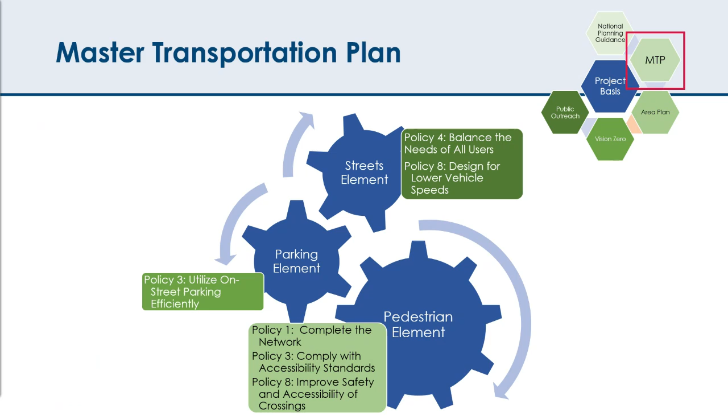I'm going to touch on the parking and pedestrian elements when talking about the area plan, because when we were developing the area plan, we took what was in the County Master Transportation Plan and looked at how to apply it in an industrial area.

4 Mile Run Drive is a little bit unique compared to other projects in Arlington County because of its industrial nature. We know there's a need to maintain access for trucks and other large vehicles that service the businesses along the street. So we kept that in mind as we were developing our concepts, while also looking at how to improve access and safety for other users.

With Jenny Dean Park recently opening on the east end of the study area, we know this area is going to continue to draw more and more visitors. Some of those visitors might be more vulnerable users like children or people with mobility issues. So when developing our concepts, we kept front and center: how do we make it safe for everyone to use the street?

Looking at what was recommended in the area plan, the plan developed a highly conceptual concept that looked at reconfiguring the roadway down from 2 lanes in each direction to 3 — meaning 1 lane in each direction with a center turn lane.

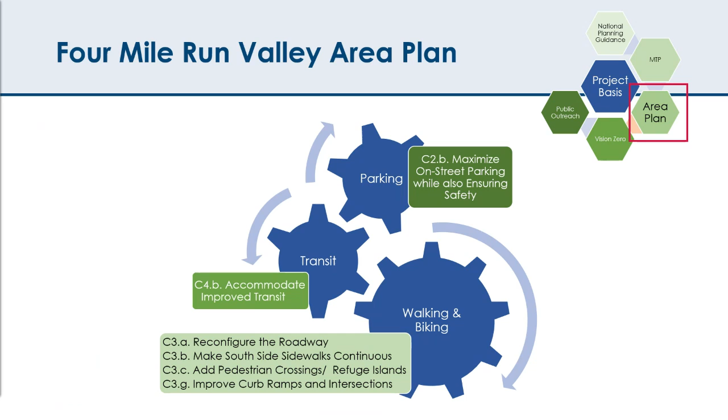I mentioned that I was going to explain a little bit more what a high injury network means. The section of 4 Mile Run Drive between Walter Reed Drive and Shirlington Road was on the high injury network, and that means that compared to other roads in Arlington County, there's a relatively high rate of severe injury crashes on this stretch.

So a couple of years ago, our traffic team did a more extensive safety study on this part of 4 Mile Run Drive. When they did that, they collected traffic data, including traffic volumes and speed data. This was really useful to us because it put hard data to some of the feedback that we heard and gave us more information to base our designs off of.

Two things I want to point out here. One is that pre-COVID, when volumes were a little bit higher than what we'd expect to see now, there were approximately 12,000 to 13,500 vehicles on this part of 4 Mile Run Drive every day. According to the Federal Highway Administration and what we see nationally, these volumes are actually relatively low compared to what you'd expect on a roadway with 2 lanes in each direction. So based on these volumes alone, we expect that reconfiguring the road to what's presented in the area plan should be relatively easy with just some minor tweaks to intersections or signal timing.

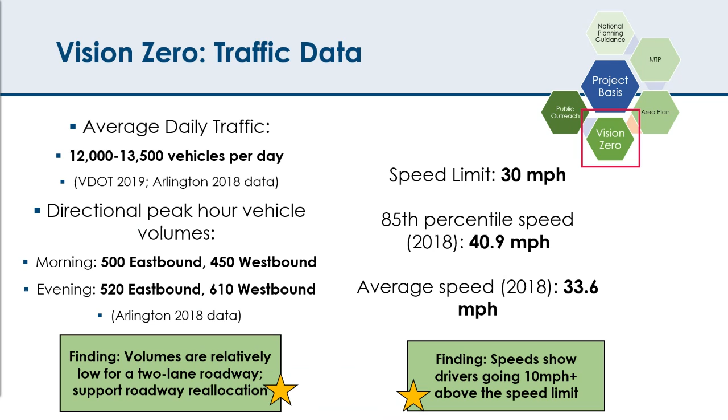I'm going to quickly talk about some of the feedback we received in June and July, but in the interest of time I'm moving quickly through some of this. We will be posting a more extensive summary of what we heard online, and I'll make sure to include a link to that when we put these slides on the project website.

We took a multi-pronged approach to gathering feedback from you all. I've already mentioned that we had our virtual public meeting in June, with 15 participants, not including county staff. We also kept an online feedback form open for 2 weeks after the virtual public meeting.

In addition to these 2 online forms of feedback, the project team actually went out onto the site one afternoon to speak to employees and managers at local businesses. We went door to door and spoke to people where we could, and managed to speak to about 13 groups of people at local businesses. We couldn't reach everyone, or some people were too busy to talk to us or didn't have immediate feedback, so when that was the case, we left flyers with my contact information and a link to the feedback form.

That same afternoon, we also stopped people as they were approaching Jenny Dean Park or along the W&OD trail to get feedback from people who frequent this roadway just as a user.

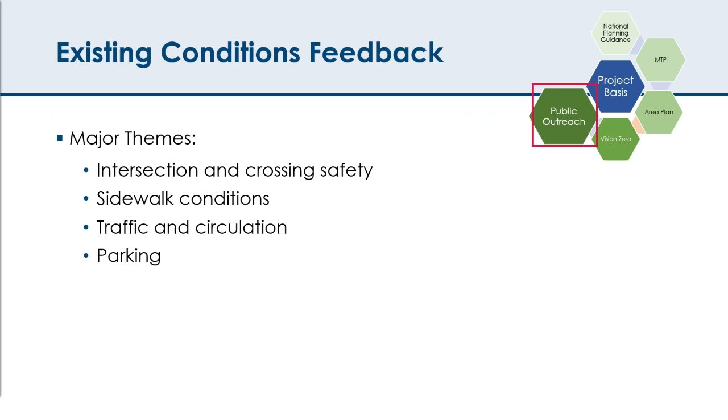So across all of these types of outreach, a couple of major themes emerged that I'll be going into in a little bit more detail.

According to our feedback form, the highest percentage of people ranked intersection and crossing safety as their first priority on this corridor. Something I found really interesting when we were in the field talking to people face to face was that this concern came from pretty much everyone who used 4 Mile Run Drive. We heard from drivers, especially those who park on the north side of the street, from pedestrians, and from people who typically use the bus, that they don't feel safe crossing 4 Mile Run Drive.

A few people elaborated and said that they feel like drivers zoom down 4 Mile Run Drive and don't look for people in the crosswalks, or don't look to see if someone is waiting to cross. And if there is someone in the crosswalk, drivers might not necessarily yield to them, so people feel unsafe using the crosswalks.

A couple of other people also pointed out that sometimes they feel unsafe crossing at intersections because the sight lines aren't good, since drivers park too close to the intersections and block sight lines from oncoming traffic. From people who typically walk on 4 Mile Run Drive, a couple said they feel like they have to actually step into traffic to be able to see oncoming vehicles.

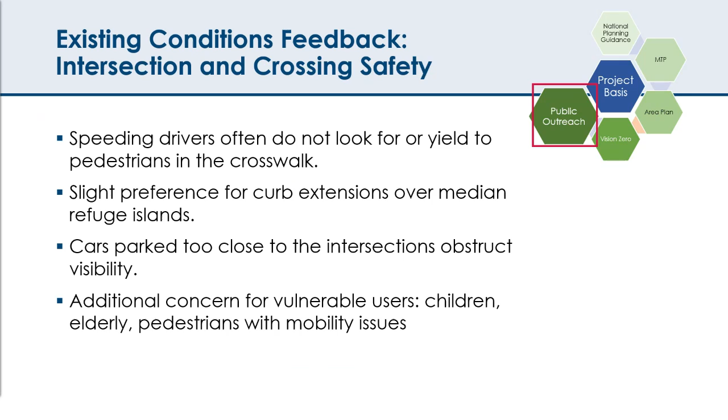The next priority ranked in our feedback form was improving sidewalk conditions on the south side. While there is a trail on the north side of 4 Mile Run Drive, all of the businesses and amenities people are trying to access are on the south side, and we heard a lot of complaints about how inconsistent that sidewalk was, or how dangerous it felt to walk on. The block between Oakland and Oxford Streets in particular was called out as a confusing or dangerous place.

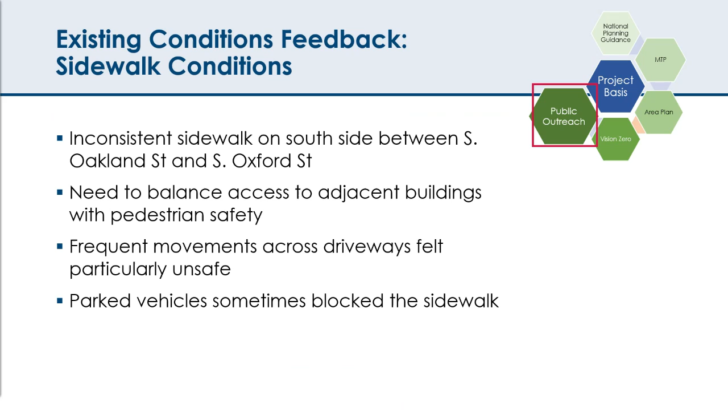We had a couple of people say they would rather cross the street twice than try to navigate that block. It seems like the sidewalk disappears or is parked over by cars frequently. We also had a couple of people say that cars moving in and out of the driveways, and there are many driveways on this part of 4 Mile Run Drive, felt particularly unsafe.

I noted earlier that one somewhat unique thing about this project is that it is an industrial corridor, so we know we need to keep that in mind as we move forward with improvements. Maintaining access to businesses and vehicle circulation to building frontages is going to be really critical, and we heard that from several people as well.

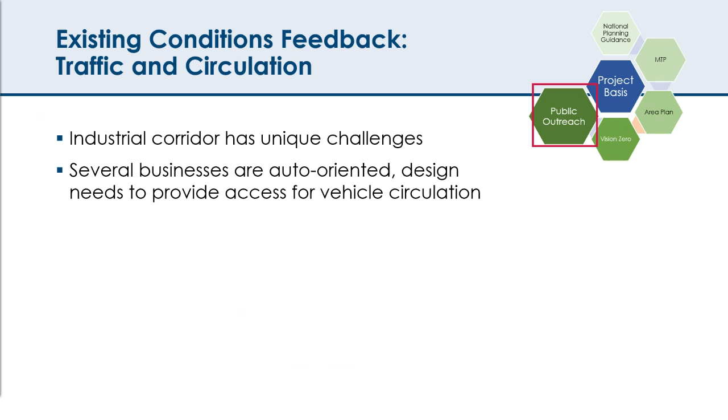And then, of course, several folks told us about a desire to see more on-street parking available on 4 Mile Run Drive. But in addition to people asking about the number of parking spaces, we also had a few people express frustration with vehicles that park in the parking lanes long term, when some of those spaces are really meant for shorter term parking.

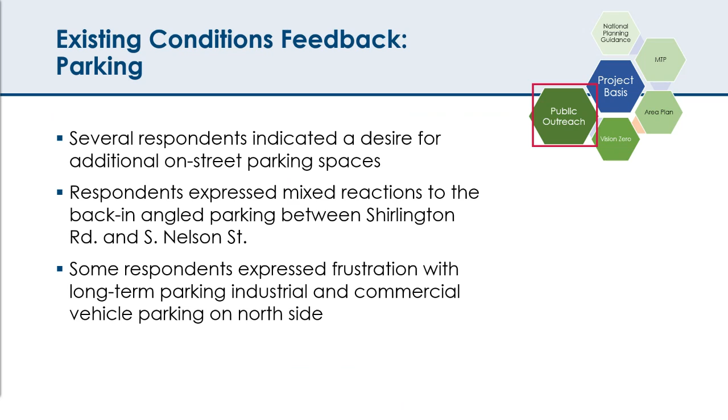I'm going to pause here to see if we have any comments from folks, but then I'll move on to going through our concept design.

Sheila, we do have one question in the chat, and I think we're going to get there. The question is, can you show the proposed design changes? As you can see on the screen here, we're just about to dive into those, and hopefully we can spend most of our time talking about these.

We can hold for, let's say, 30 seconds and see if there are any others, since you had asked.

I'm also going to include links to some of the other resources I mentioned. If folks have questions about the existing conditions feedback, we'll be posting a more extensive summary online. The Vision Zero Safety Study link will be included in the last slide of this presentation.

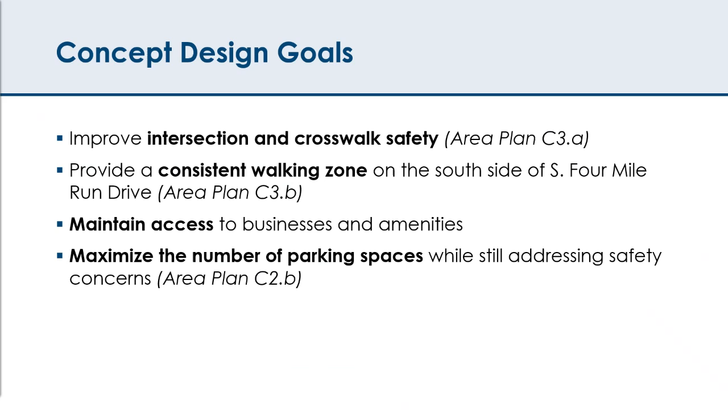I'm going to show our two proposed concepts side by side in just a minute, and I'll be moving through them by intersection and block. You'll notice that they have a lot in common visually.

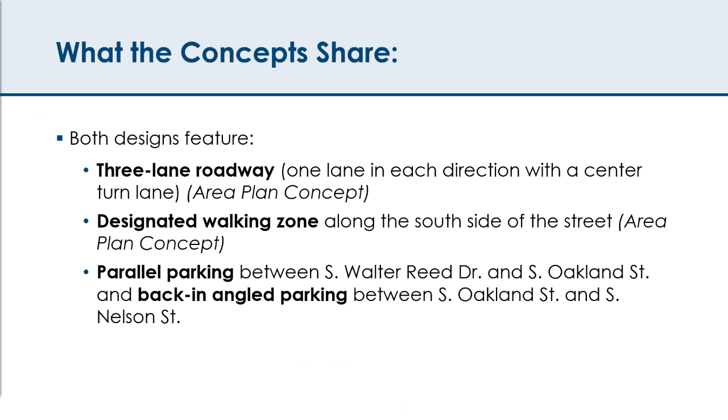Both designs show the roadway being reconfigured to a 3-lane roadway, and we're showing a designated walking zone on the south side. Again, both of those elements are pulled directly from the area plan. We're also proposing a mix of parallel parking and back-in angled parking, and I'll explain why once we move through the images.

The major difference between our two concepts is that in one, we're designating the walking zone only with pavement marking striping, whereas in the other, we're reinforcing and providing a physical barrier between the walkway and the vehicle lane with Jersey barriers and bollards.

In concept one, where we're just using pavement marking striping, we're also maintaining the existing widths of all driveways and curb cuts as they are right now. Because this has less of an impact on how vehicle circulation moves along 4 Mile Run Drive, we're pretty confident that this can be implemented in September. That goes back to what I was saying about our project timeline.

Concept two: the Jersey barriers and bollards are going to change how the street feels more intensely. We're also proposing narrowing some driveways and curb cuts to be closer in line with what county standard is today, which is 20 to 30 feet.

We know this is going to require additional conversation with employees and business owners, and it's going to take a little more thought to figure out how to maintain access for trucks and other people who need to access business frontages. So we'll need to spend a little more time on that design, and because of that, we don't think we'd be able to install concept two until spring of next year.

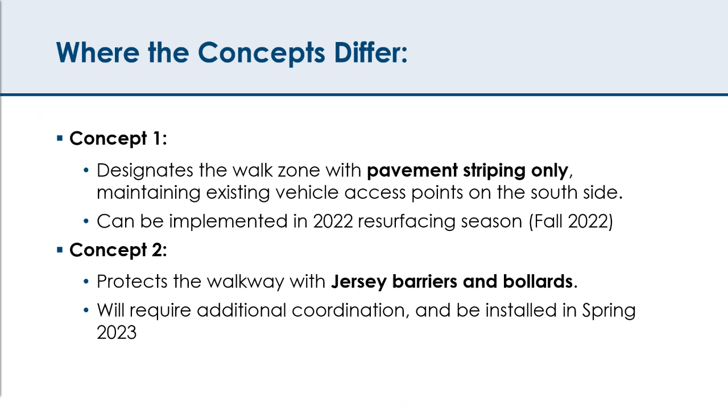So we'll start with the Walter Reed Drive intersection. As I move through each section, I'm going to show 3 slides: one just shows concepts 1 and 2 on their own without any annotation, another calls out what they have in common, and then a slide that highlights the differences between the two. Then we'll pause for discussion.

At the Walter Reed Drive intersection, we're not repaving the intersection itself or anything to the west of it, but we still needed to figure out how to transition between 2 vehicle lanes going eastbound down into just 1 lane in our project area.

I asked our traffic team to take a look at how this intersection operates. We found that if we changed one of the 3 lanes on the west side to a right-turn-only lane and made small changes to signal timing, based on how this intersection operates during rush hour, it'll continue to operate as it does now after we implement these changes.

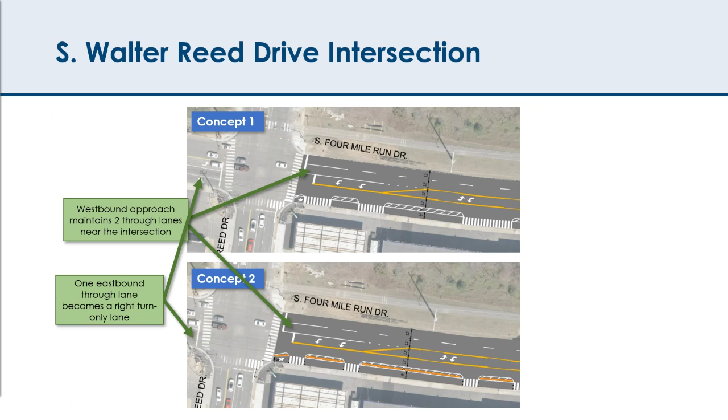Going westbound, we do need another through lane, so we are including a second lane for about 350 feet. You'll see in the next section that after that 350 feet, that second lane turns into a parking lane. But per our analysis, we think that 350 feet will provide enough space to get people through the intersection.

Now you can begin to see how the Jersey barriers and bollards are going to change the way that people experience these two concepts.

In concept 1, we were particularly concerned about how drivers turning off of Walter Reed onto 4 Mile Run Drive were going to know that they can no longer turn into a lane that's right up against the curb. So to direct them into the vehicle lane and keep them from turning into the walkway, we're using lane striping to lead them into what's now 1 lane going eastbound.

I did want to mention that our design engineers modeled what a truck turning movement would look like at this intersection, and that's how we came up with the location and the curve of this lane line.

In concept 2, we're following the same curve and the same pavement marking striping, but we are reinforcing and providing a physical barrier between people walking and people driving with Jersey barriers and bollards. So those barriers will just add additional protection to the walkway on the south side.

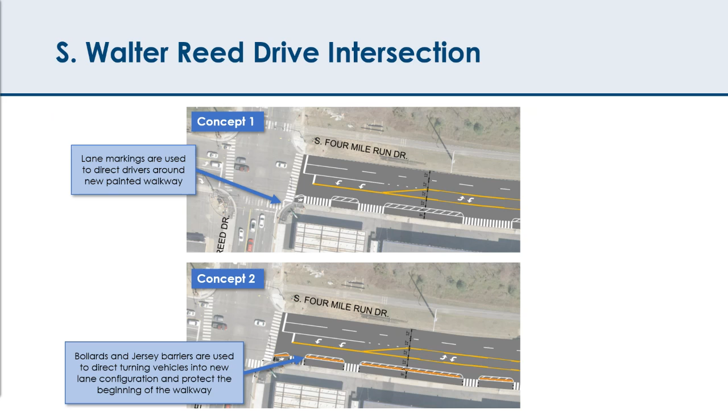Right, I'm going to pause here and take comments.

All right, we did get one comment. It was sent privately, so I can't publish it, but the question is: are you going to add a left turn arrow for the westbound side? I assume that is on the signal head. Would there be a dedicated left?

I think we'll have to talk to our traffic team about what that would look like and how quickly we'd be able to implement it. I'm more worried about changes to the number of phases of the traffic signal than just adding the arrow, but that's something we can ask them about.

All right, we have another question. I'll publish it here. The question is: in concept 1, it seems like it would create a high risk of drivers entering the pedestrian area, especially at night or if driving poorly. People may not feel safe and may not want to use it. Concept 2 seems much safer.

Yeah, I really appreciate that comment. I think one thing we're weighing here between concept 1 and concept 2 is that they're both showing a walkway on the south side. I think if we did move forward with concept 1, we could certainly build upon it before we get to that longer term vision of actually moving the curb out.

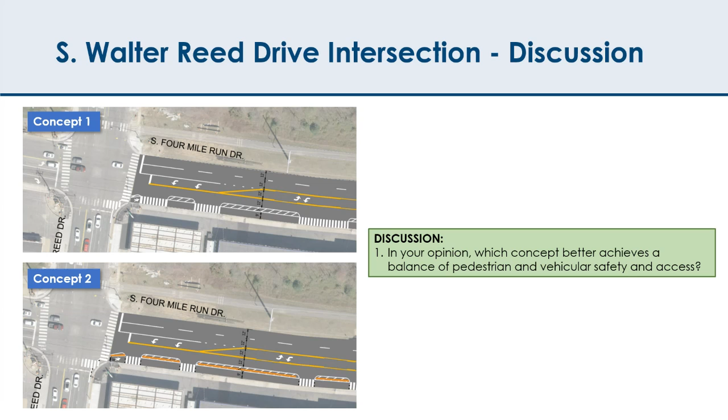So next we're going to be looking at the block between Walter Reed and Oakland. About 350 feet east of the Walter Reed intersection, we're dropping that second lane and turning it into a parallel parking lane. We designed this parallel parking lane to be wide enough for larger vehicles and trucks to comfortably use. We're also using pavement markings and bollards to begin to mock up a median refuge island at Oakland Street, providing pedestrians a space to wait and look for a gap in westbound traffic after crossing the eastbound traffic. Longer term, once we get additional funding and do additional engineering, we'll hopefully install a raised median refuge island there, but right now we can still provide some physical protection with these quick build methods.

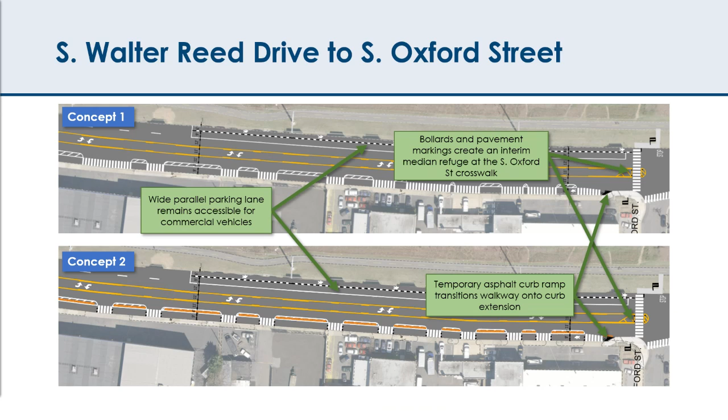And then you'll see here that there's an existing bump out on the south side of Oxford Street. That bump out is used as a bus stop, so to get people off of our painted asphalt walkway and up onto the curb so they can load buses from that bump out, we're going to be constructing a temporary asphalt curb or curb ramp. The intention is to replace it with a more permanent solution once we develop our long-term vision.

Because this is a larger block from our concepts, you can get a better sense of how we would be changing and narrowing curb cuts. The county standard for commercial driveways right now is 20 to 30 feet wide. However, if we move forward with concept 2, we would be working with business owners to get a better sense of how some of these access points are currently used. We have the ability to model turning movements from trucks and other vehicles that use these roads.

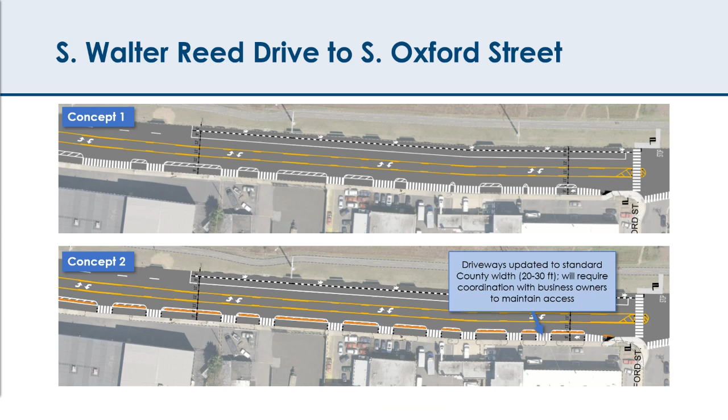Before we launch into discussion, I wanted to note that we worked through a lot of concepts we aren't presenting tonight because they weren't really addressing our safety concerns. One concept we looked at showed back-in parking on this section of Four Mile Run Drive purely to increase the number of parking spaces. But based on feedback, and remembering that this is an industrial area with a need to provide for trucks and larger vehicles, we decided to move forward with parallel parking in both concepts. If there's interest in having back-in and angled parking to increase the number of spaces, that's a concept we can speak more about, but for now we think we want to move forward with parallel parking in either concept.

Okay Sheila, we got a question on the slide, if you're ready to take questions. It's actually a comment: we have tractor trailers coming in and out from both directions, not to mention our own trucks and garbage and recycling coming in and out of 3870. There is no way the hardscape will allow the radius needed.

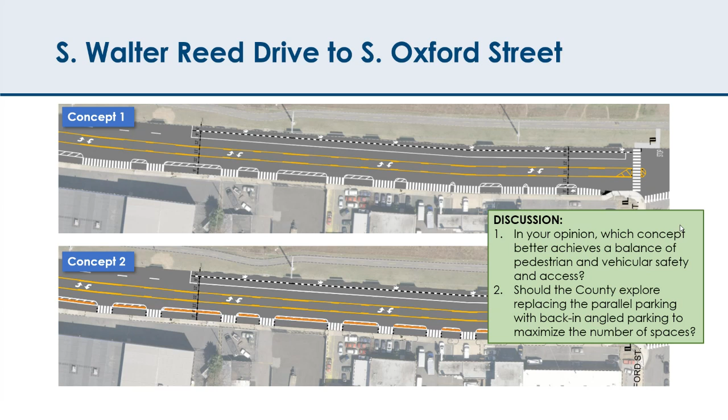This block was called out pretty frequently in our existing conditions outreach as one where pedestrians especially felt really unsafe navigating the south side of the street. It's also getting a little closer to amenities where you'd expect people to be trying to access by walking.

I already talked about that back-in angled parking and why we're including it instead of keeping parallel parking on the south side of the street.

By using back-in angled parking instead of keeping the parallel parking lane, we were able to maintain the number of parking spaces. With the concepts we're showing tonight, we're actually increasing the number of spaces by 1. If we were to keep parallel parking on both blocks of our study area, we'd intuitively be cutting back the number of parking spaces almost by half.

That said, we did think it was important to use a mix of parallel parking and these back-in spaces to balance keeping the number of spaces with also providing some parking spaces for larger vehicles.

One other thing to note is there's an existing bus stop on the north side on Oxford Street as well. So as we get close to that bus stop and the concrete pad, the back-in angled parking gives way into a zone where buses can pull out against where pedestrians or bus riders would be waiting to board.

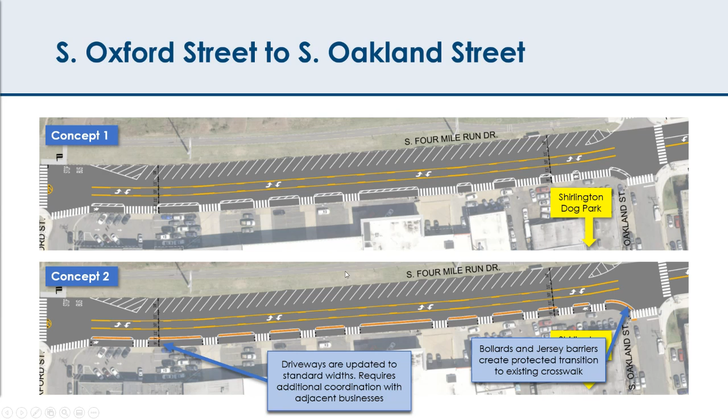This question is, if cars are parked on the north side, how do pedestrians cross 4 Mile Run? Do they have to double back to Oxford? I envision a lot of jaywalking. So by pedestrians, I'm assuming you mean people getting out of the cars and then walking. I think the expectation would be that they walk to the nearest crosswalk and then cross. People are probably still going to jaywalk, unfortunately, but at least having that lane reduction that encourages people to drive more slowly will make it safer for people who are parking on the north side as well.

Sheila, how long is the block? I do not know. I can take that measurement quickly in my other screen, or we could provide that information later.

Well, I'll do it very quickly, and the reason I ask is that we do know that pedestrians will likely not walk more than 250 feet. And so if someone were to park in the middle, right, that would be just over 375 feet.

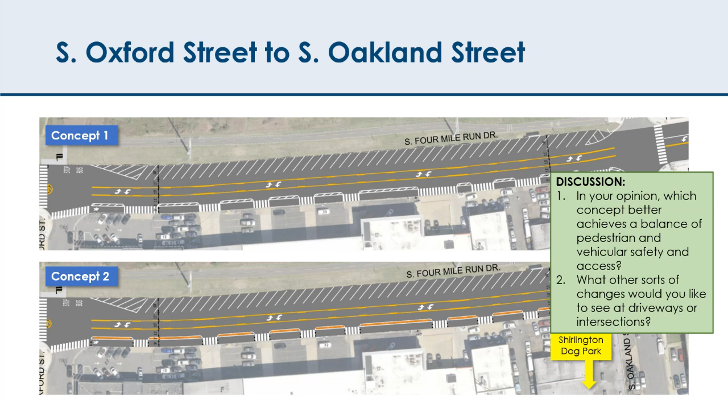I'm going to go ahead and move to the block between Oakland and Nelson, since we did get a question about that already. I'm only showing one image for this block because it's more or less the same for both concepts, because there's an existing sidewalk here on the south side that we don't feel like we need to rebuild or supplement with an asphalt walkway. We're really just using this block as a transition between the improvements we did in front of Jennie Dean Park last year, with the back-in parking on the south side, to what our consistent design is west of Oakland, with that back-in parking shifting to the north side.

Between Oakland and Nelson, and I apologize that part of this design is covered with a label for AFAC, we have one lane in each direction with a right turn lane going towards Nelson eastbound. Going westbound, the lane widens up to allow a little bit of space for buses to pull over to the curb at the existing bus stop. Then in the other direction going eastbound, the second lane is a space for buses to again pull over to the curb so that cars behind them can continue to go through.

Because we did have a little bit of extra space up top, we went ahead and continued the parallel parking that's on the north side in front of Jennie Dean Park, and really just continued the design we had up there until the existing curb bump out.

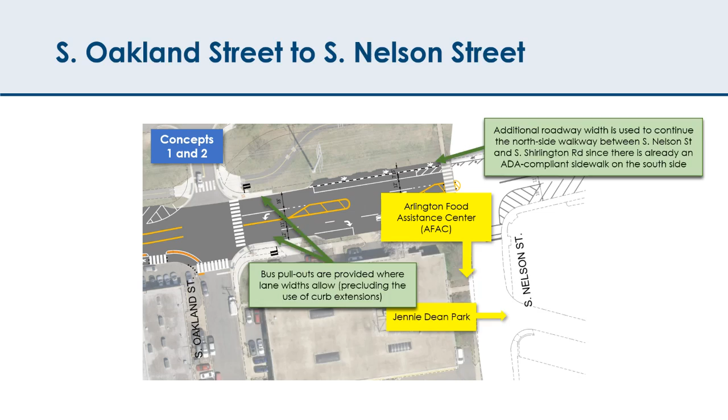I just explained both of these, so we can move right into discussion for this block. If folks have comments, please drop them into the chat box.

While we wait for questions or comments, certainly we appreciate the feedback on the barriers for different reasons, and we're taking that all in. I don't want people to come away from this meeting thinking that we're going to implement something based on majority rules or comments that come in. But if you haven't spoken up today and you want to send feedback later, that's great. It's understood that the barriers are, in most people's opinion, not attractive. There are trade-offs, pros and cons to all the different elements of this, and so we'll sort through and see what fits best for this community. We'll post that and the reasoning behind it on our website once we get all of that feedback, and be very transparent about what was received and how we came to conclusions. So thank you everybody for the comments.

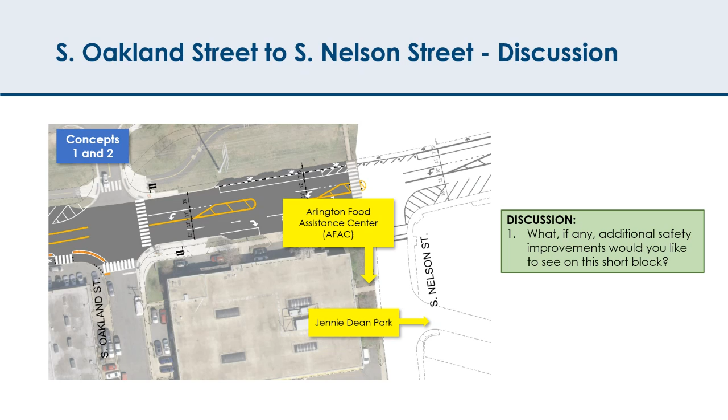All right, well, we don't have any more questions or comments, and I know we've run past time. I'll let Sheila close it up, but I'll also just say thank you to everybody for attending tonight and providing the questions and comments.

So just to quickly wrap things up, the next step in the process is choosing a preferred concept, and I think we heard a lot of comments about both concepts that we presented. We heard a wide range of opinions. So we'll work to finalize the design. Obviously, the timeline for implementation sounds like it's still up in the air and is going to depend on additional coordination and how we choose to finalize the design. So we'll continue to provide updates to the civic associations, to the rest of the community, and we'll certainly post updates to our website as well for the general public.